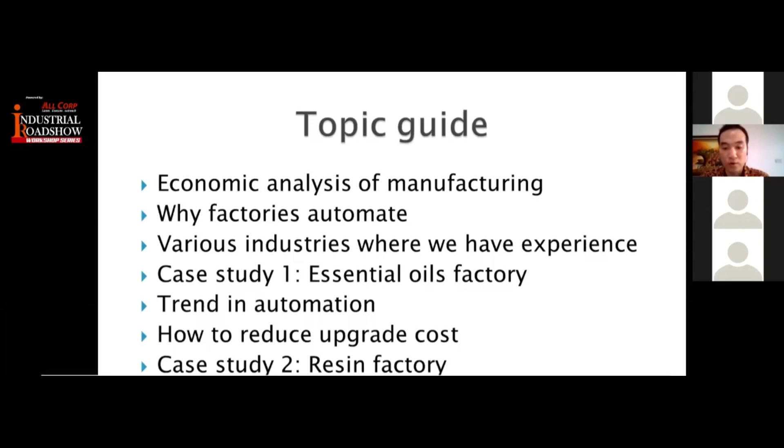As we know, as business owners, the main thing you actually want in the end is the net profit, right? It's a factor of three things: revenue, expenses, and finally the cost of production, which is COGS, cost of goods sold.

The first part, revenue, is to do with how to sell more, so that's to do with branding, product, and things like that. The second part is expenses, things such as electricity, rent, and other costs.

Finally there's the cost of goods sold, which is how much it costs to make your finished product. That's a component of labor cost and cost of waste product, usually products that you already made but failed the QC, quality control, process, so you cannot sell them to the customer.

So it becomes waste. The third component is productivity, in that how much your factory can make in one day or one shift. Now, these three things are usually the main reasons why a lot of factories automate, and this is the core of what we are trying to improve with our service.

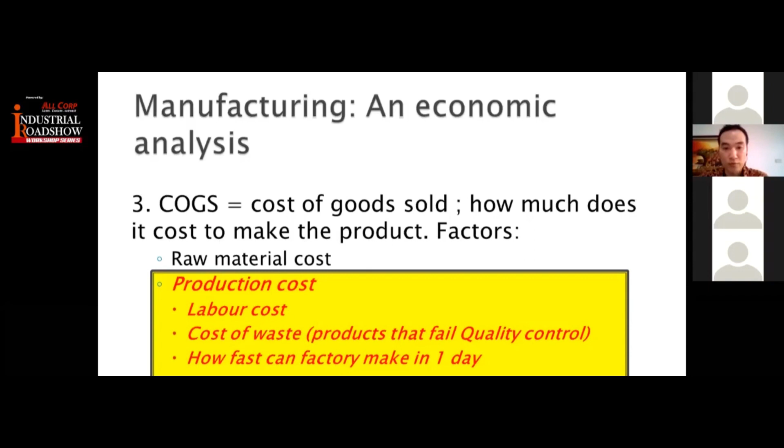So why do so many factories automate? You will see that in developed economies there's usually more automation. In developing countries such as Indonesia and maybe Myanmar, the level of automation is less.

But the reason why eventually most places automate is because, number one, your labor costs usually become more and more expensive over time. In Indonesia, labor costs each year usually go up 5, 10, 15% every year, and you still have to take into account things like health insurance and other costs.

These things will make your production cost increase compared to automation, where it's usually initial capital expenditure, but after that it's very low maintenance and definitely does not go up in price every year. So the main reason why companies automate is to reduce the labor costs required for manufacturing.

Number two, which is less known, is you usually get improved product quality. We will go into the case study and you will see what I mean by this, but improving product quality is very important if you are to get the most out of your revenue - reducing waste material and improving consistency of product so that your customers get the same product every time.

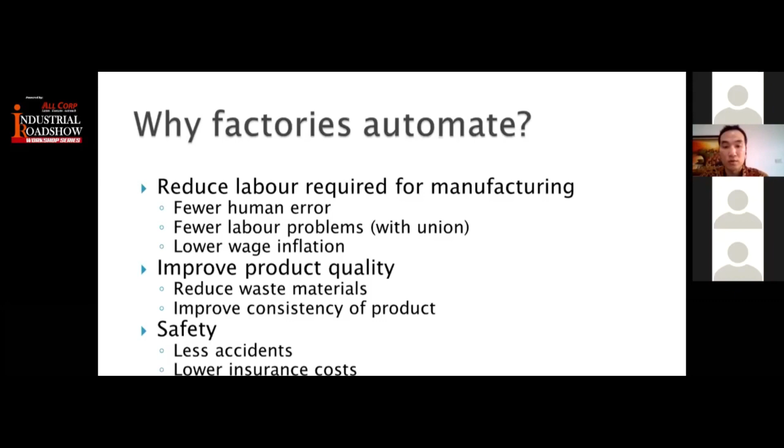So in summary, lower cost of goods sold will mean higher net profit. Now, not all automation is the same.

The process that we do is the table on the left, which we call process automation - things like heating and cooling, batching, other industrial processes, mixing, things like this - compared to task automation. The main difference is usually that with the table on the right, you can already buy a complete machine.

Things like a bottling machine, maybe a noodle maker - you just put in the raw material and it comes out as the finished product, or a printing machine. These kinds of machines, we do not do - they are not our expertise. What we do is mostly a whole factory of automation, and then we provide parts and components of that system.

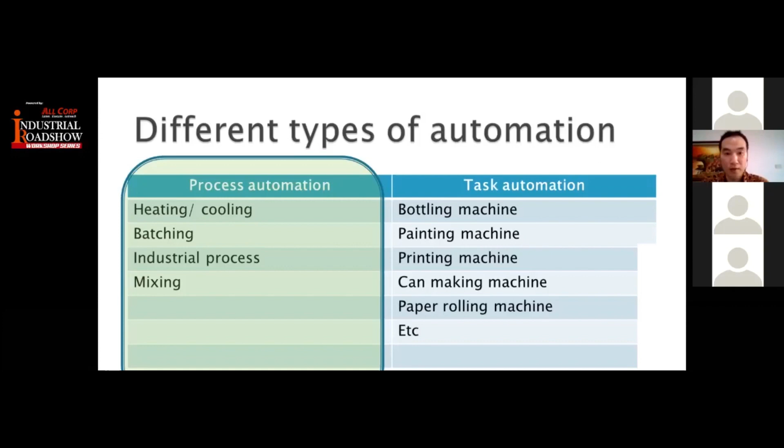Now, can my factory become automatic?

Almost always the answer is yes. Other than factories where you need special human skills, such as maybe a cup factory where you need to make the cup by hand, like a handmade cup factory or things like that. But most factories can, and most factories always go to some percent of being automated.

Some of the main actions that can go automated are things like opening, closing valves, turning on or off pumps, agitator, blower, or your boiler machines, reading all sensors on the field, temperature, pressure, flow, level, right? Things like that, as well as batching. So batching is: I want to create 1,000 liters of product. That is called batching. It's very hard to do with manual labor, and it takes a lot longer per process.

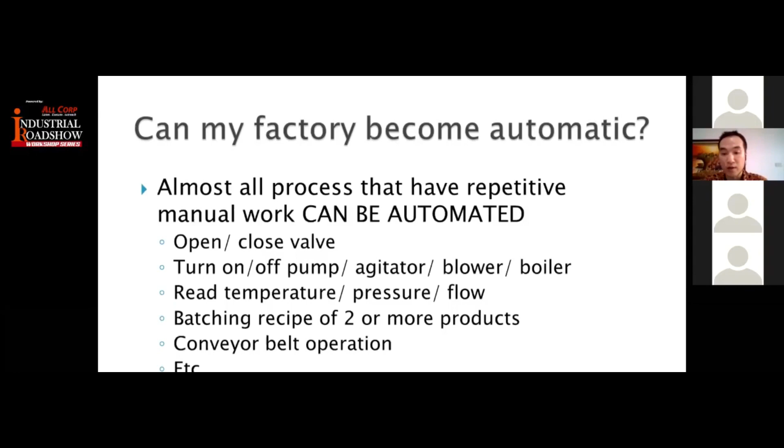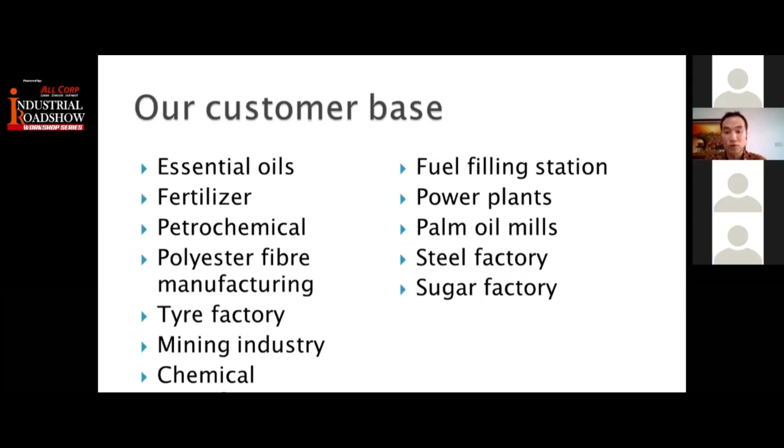Now, some of the factories that we have had experience in, if your factory is in this list, then you know that this is the trend worldwide. So things like essential oil, fertilizer, petrochemical, polyester fiber manufacturing, tires, mining industry, chemical. Chemical is a big one. I don't know what the industry of chemical is in Myanmar. Fuel filling stations, power plants, palm oil mills, steel and sugar factories. So if you have a factory along these industries, then you know for sure a lot of the process can be automated.

Okay, so we go to our first case study. So we recently did this probably about 1 year ago. It's an essential oil factory. So essential oil is like getting usually the smell of a product. For example, clove or cinnamon or coffee or vanilla, things like that. So they get the raw material, which is, for example, coffee beans, and then they want to get the chemical that has that smell, right?

The key process that they automate is a process called fractional distillation, right? It's basically heating up the oil until it becomes gas. And then the gas is condensed and then it becomes a pure essential oil from that material, right? So we'll go through the process a little bit. So the material is inserted into the tank and then mixed with water. In this way, the essential oil will go into the water, and then it is pressurized to a high pressure so that all of the oil from the material goes into the water.

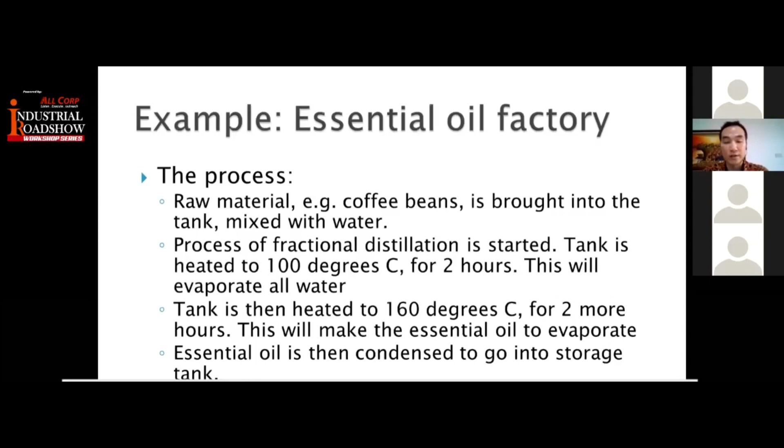So this process is not very complex, but it is high risk because you have high temperature, high pressure, and a lot of components need to be monitored for safety. So in the past, they had field operators to manually open and close the steam for the temperature, things like opening, closing valves for the condenser tanks, and then also monitoring the pressure and venting valves. So there's a lot of manpower involved.

So when we look at the study of the before and after, the initial headcount for their operation totaled 14 people, right? So you have 7 operators for the production, the fractional distillation component, and then you have an extra 7 people for the utilities. So the wastewater treatment plant, the boiler, as well as production manager and QC. So this is just on the plant floor.

So there's 14 people. Now, after the automation, what you get is a total of 6 people, because all those people who are opening and closing valves, monitoring pressure, monitoring temperature, all of those people can now just sit in the control room looking at the computer screen, and everything is controlled from the computer screen. So there's just 2 people on maintenance. So usually there's people on the plant floor, 1 person in the control room, and then the rest is the same.

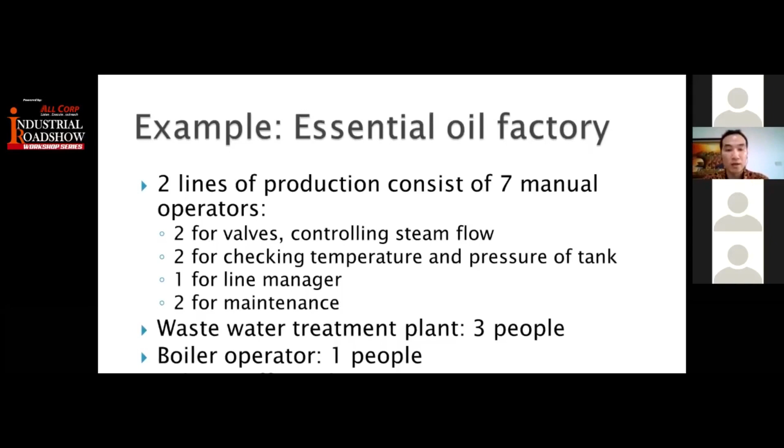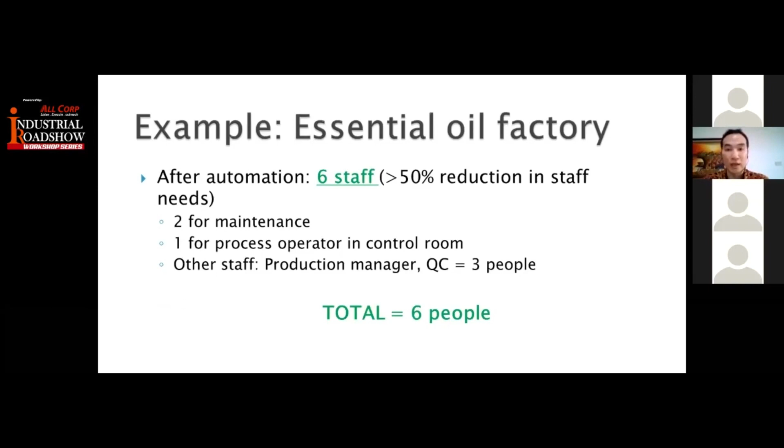So the production manager and QC is still the same. If you look at the previous slide, on the last line, production manager and QC is still 3 people. So that's not changed. But all the people doing the process on the floor is essentially reduced to 2 for maintenance and 1 for control room. So that's more than 50% reduction in labor staff requirement, right?

Now, some of the benefits of what this upgrade has brought to this factory. The first part is that you get production increase. How did this happen? Firstly, because the temperature is monitored instantly and all controlled from the one site, you can achieve the temperature a lot quicker. Maybe before it took them 1 hour to reach 100 degrees. Now they can get that in 30 minutes, right? And you also can monitor the process a lot better. The end result is you get a lot more product from the same equipment.

Secondly, waste material is reduced by 20%. What happens in this waste material? In the past, because the process took a lot longer, you need more diesel, you need more water, things like this. And all of that is reduced because of automation.

Number three is better consistency in finished product. Previously, you get bad product if the temperature is too high. In that case, the essential oil will be a little bit damaged. And this means that they have to throw away some products because it's too hot, and then the essential oil becomes bad.

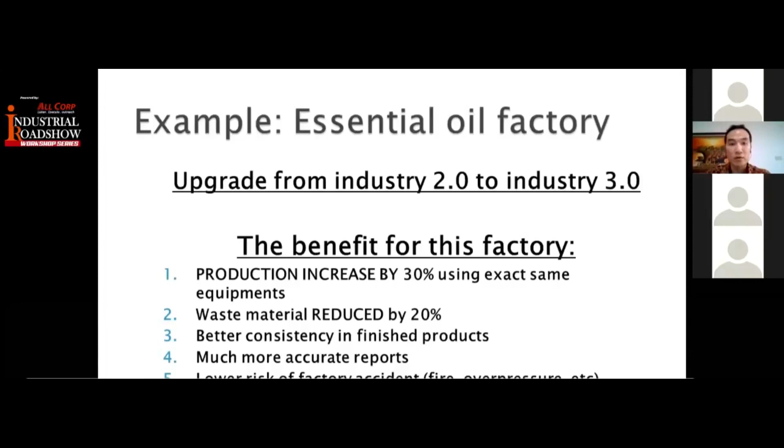Let's go into the operator screen. So this is a quick look of what the finished plant looked like. Now I don't know if I can use the mouse here, but you see on the left, on column A, there's about 12 temperature sensors, there's pressure sensors, and there's a lot of things like level switches. So all of this had to be controlled.

For example, if you look at the left side, there's a logo called Thermic. Thermic is basically the valve that controls the steam. The steam is the thing that heats up all the tanks. So that's the temperature control, where it's a lot more efficient and accurate compared to manual work. Now, this is just one screenshot of the plant, where you can see everything on the one screen, everything is recorded, and everything can be automatically shut down centrally. This helps a lot with safety, accuracy, and efficiency.

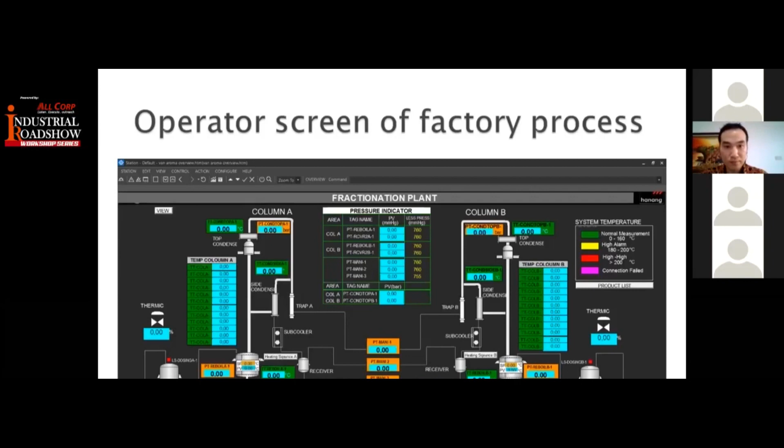Right. So this is a financial analysis of this upgrade. Obviously, all the tanks, the boiler and the valves are already there. We just have to automate them. So the cost is not as high; you would have to buy them all if you didn't have them from the beginning. So we just had to do a minor upgrade on the plant floor, but we add a lot of the brain, which is called the control system, right?

So the cost of the project, including installation, is 30,000 US dollars, right? Now, when they look at it, the cost savings of the wage cost per year last year adds up to about $25,000 per year for 8 people, right? So this was the one factor that they look at. Obviously, there's other factors like less waste product and things like that, but we are not given information on that.

So even looking at just the one factor, which is manual labor and the cost savings, you get a very high return on investment with a payback period of less than 2 years. So you get a very quick return on investment on automation. Now, not every project is going to be this high of investment return rate, but I'm just saying that it can be this high and it can be even higher.

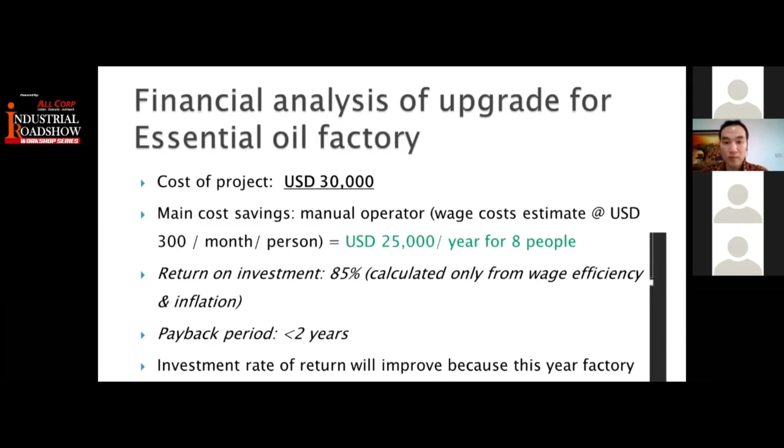So basically, with control system projects and automation, it's very flexible, meaning that you can start small and then add on to the project. That way you get better return on investment every time you upgrade. Now, a quick one on the trend in automation. Now, we all hear a lot about Industry 4.0, but what most people misunderstand is what 4.0 means. Now, let me go through all the automation versions.

These are quite industry-specific terms, right? And there's a lot less labor required, right? As you can see before, you have more than 50% reduction in labor headcount once you apply automation. In some cases, it can be up to 70% reduction in labor requirement. Now, the next part, which is what we have now, is Industry 4.0. What does it mean? It's Industry 3.0 combined with IT infrastructure.

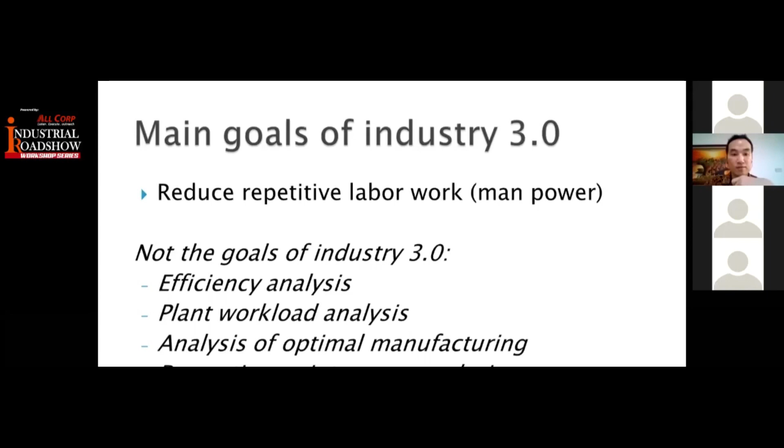So if I go to the next slide, you can see in 4.0, you have all these things like efficiency analysis, plant workload analysis, optimal manufacturing. For example, should I make material A first or B first or C first? And then the next one is preventive maintenance. So is my pump or motor almost at breaking point? Should I service it before it breaks down and makes my factory shut down?

And then all these other analyses, like waste material analysis, were not possible automatically before. In the past, you would have to make a production report, a main material usage report, and then combine it into other systems like ERP and MES systems. But now in Industry 4.0, you can combine all of this data into the ERP systems in real time, and you get a much better analysis.

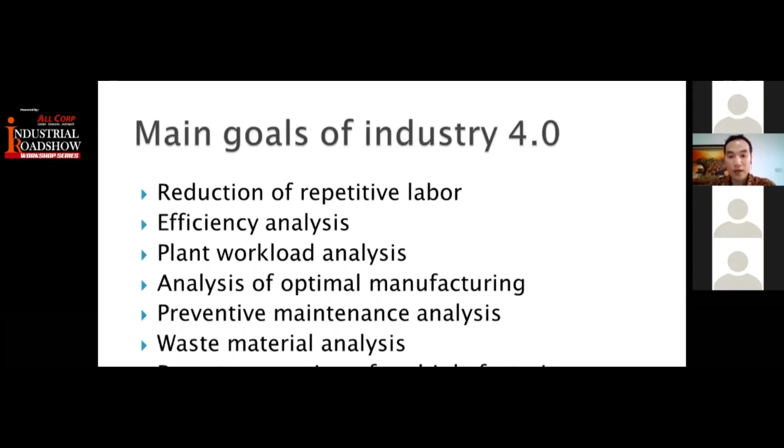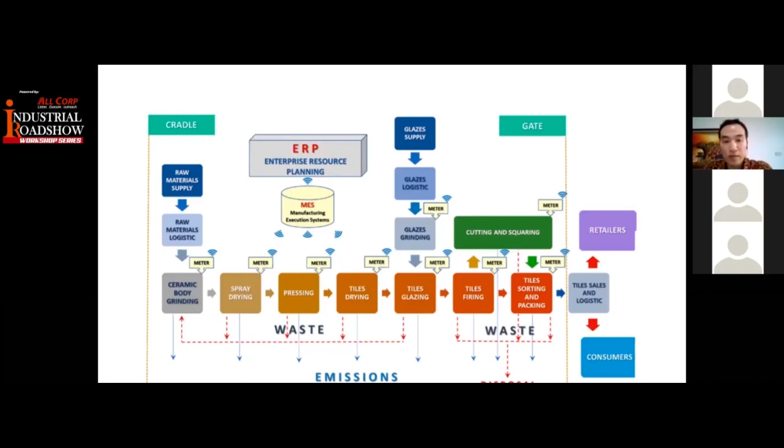Now, if we go to the next slide, I look at the reasons why a factory should or should not go to 4.0. The first point is that companies without ERP systems and MES systems - MES is a manufacturing execution system - if you do not have those systems in place, there isn't really much benefit from going to 4.0. It'd be good enough to just stay in 3.0.

Now, the majority of automation costs occur in upgrading from 2.0 to 3.0. The final thing I want to note is that going from 3.0 to 4.0 is very complex, because most integrators like my company only focus on the plant floor. But in 4.0, you need integrators who are very experienced with IT systems, like ERP systems like SAP, for example. Most integrators who do automation do not have this expertise.

So if you're going from 3.0 to 4.0, you must know that it requires a whole new level of integrator experience. A lot of projects have failed in Indonesia because the integrators are not yet experienced in these two different worlds. Most of the time, as an automation provider, we do not need to know IT systems. But in 4.0, you really need to know IT systems, especially when working with third-party software like SAP or Oracle. This is not something that we or other integrators in the industry have had. So you must be careful when going to 4.0, because it's a whole new level of complexity.

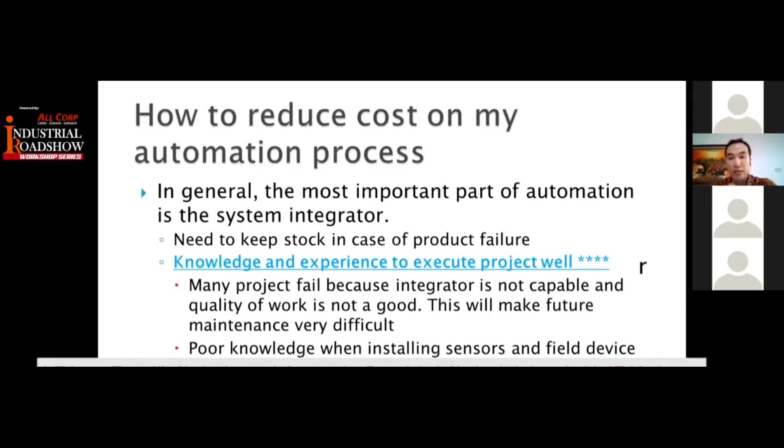That's the main thing, because as you know, when building a house, you can have really good materials, but if the person installing it is not competent, you can end up with a very bad house even though the material is good, because the installation is the key part. So you want to find an integrator that has a lot of experience and a good support team, because no project is ever good from day one - it always needs improvement. So the integrator needs a good, experienced team.

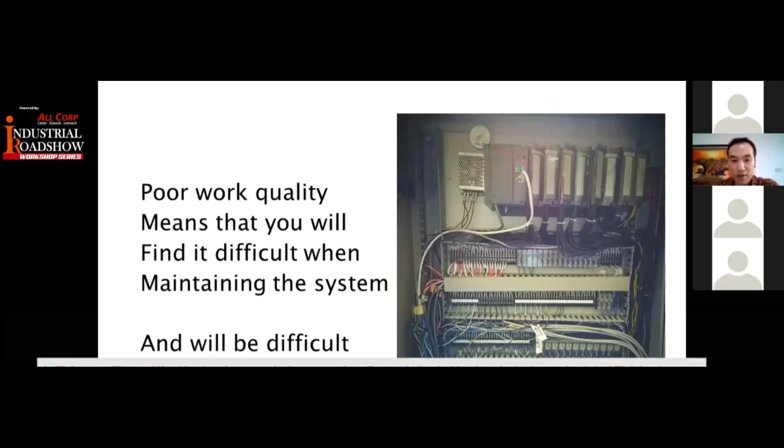Now the second point - here's a photo of badly done work. As you can see, the cabling is not well done. A bad integrator can mean you'll have a very hard time upgrading your system, or if something is wrong, it'll be very hard to find out where. As you can see here, it's a spaghetti situation - you don't know which wire is wrong or where. So this is a bad job. Now, the second most important part of automation is the control system.

The control system is the brain of the automation factory. The brain is the one that is on all the time and works all the time. So in most cases, it's usually a PLC, or in a bigger factory, it's a DCS.

You want to go with brands that are reputable with a long track record. We bring the brand of Honeywell, which is from USA, but usually the most common brands in this field are Japanese or European, mainly Germany, as well as USA. So you want something that has high reliability and is a proven product.

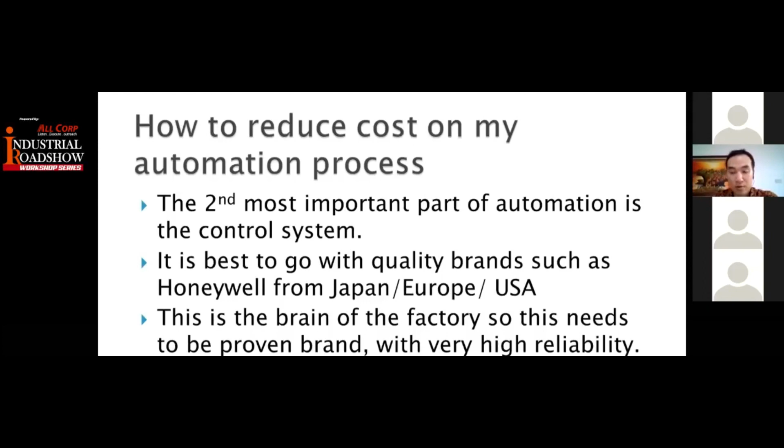Because if this component fails, your factory will not operate. If it takes 1 day to fix, you will lose 1 day of production, and that is a lot of money. So the price difference between a cheap brand and a good brand is very small. It makes no sense to save money on something like that.

Now the final part of the automation is the field device. So these are things like your pumps, valves, pressure sensor, temperature sensor. This is the part where there are so many choices.

Usually the best quality products are from USA, Germany, Japan. The middle quality is usually Korea, Taiwan brands. And then the lower price, where you have probably the very, very cheap price, but also maybe the quality is not so good, is from China and India.

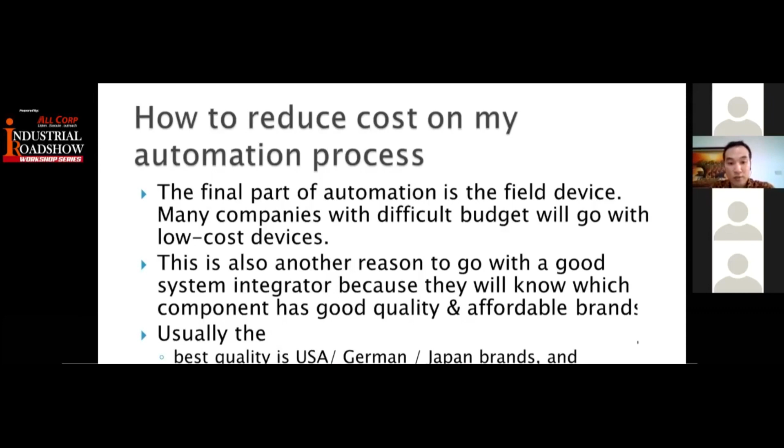So these two countries usually, for factories who are just trying out automation and don't have a lot of budget, they usually start off with Chinese brand or Indian brand, and then as they see the benefit of automation and have more cash flow, they will upgrade to the other brands above it.

Now, usually in most cases, this is the part where companies will try to reduce their budget, because even Chinese or Indian brands will still work. You may not get a long lifetime, but they will still work, and the accuracy depends on what you buy.

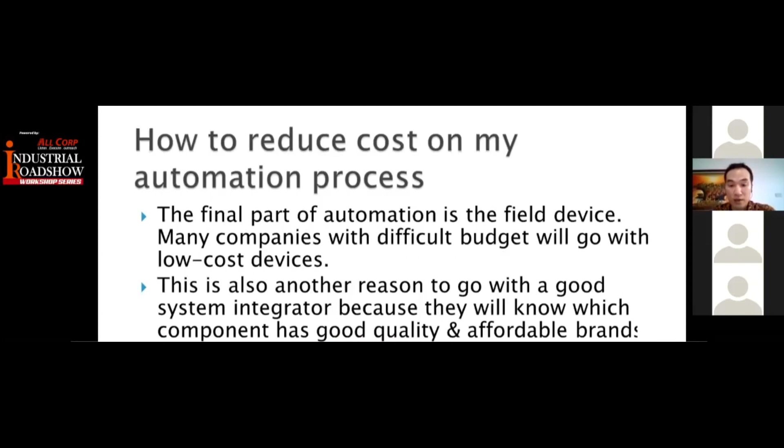Here's the other part that we see a lot of companies use to reduce the capex, the capital expenditure cost of an upgrade. One of the bigger cost benefits is to skip using a consultant or an EPC company.

We have worked with many companies who try to automate, and instead of hiring a consultant company or an EPC company, they hire an expert as the project leader. This project leader is essentially the person with the design and the knowledge.

Usually this project leader has worked in a factory that is already automated, so you can understand what the other companies have done, and then they will help you make your factories a lot better. This method is a lot cheaper than going with a consultant or an EPC company. So an EPC company is like the main contractor of a factory automation project.

As a benefit, you get not only cost savings, but your team will also know your factory automation a lot better because they execute the project themselves. And then you can bring companies like my company to do the actual field products.

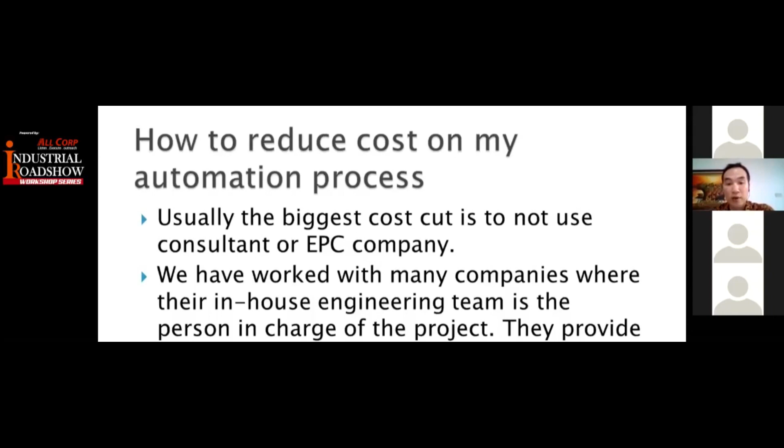Mistakes on these projects: number one is always the system integrator. A lot of system integrators, when you ask them at the beginning, do you know how to do this? They always say yes. But you really want somebody, if you get a reference or case study of what they've done, so you know that they actually know what they are doing.

And the second part is usually the equipment that is chosen by the integrator who is not experienced. So things like materials that are not compatible, so you get corrosion or very short lifetime. Things like materials that are not rated for temperature and pressure of your factory, so it breaks down a lot quicker.

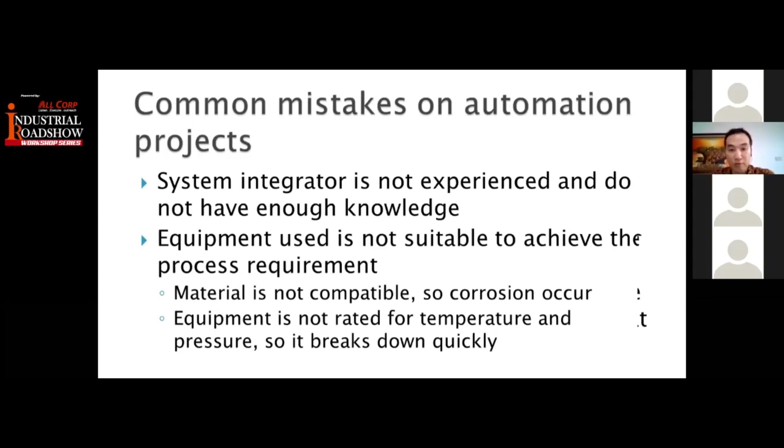Right, so we'll quickly finish up. This is the final case study. It's a resin plant. This is the same story — it used to be mostly a manual plant, so they would mix. Resin is like adhesive that you use for furniture to make the wood stick. If you look at low cost tables, it's actually wood chips, not solid wood, but wood chips, and then it's combined with resin to become a solid wooden material.

So it's a combination of 6 or 7 chemicals, such as formalin, water, nitric acid, and so on. You need to mix it according to customer request. The customer with the highest quality will ask for the most active agent like formalin, so it becomes more sticky. Whereas the cheaper customer cannot afford the expensive product, so they need to just add more water so it's cheaper.

So in this project, the main complexity is in batching and ratio control, because all of those things need to be mixed to the correct concentration.

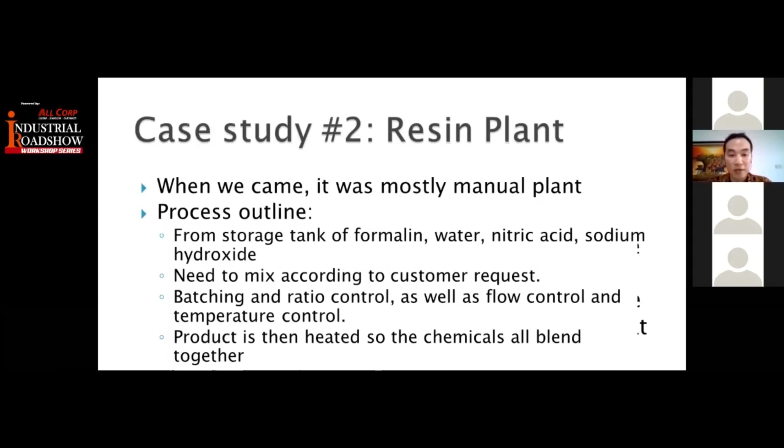Now, another component is that about 5 years ago, they had one big accident where the chemical pump was not turned off, but on the other side, the valve to the tank was already closed off. So you have this situation where the pump is still pumping, but the outlet is already closed. So you get a big pressure buildup, and then eventually the pipe burst. This caused all the chemicals to spill on the floor and cause a big problem, a factory shutdown, and many government fines.

And then you can even add recipes. So for example, customer A is buying the same concentration mix every time. You can put that into a recipe, and then with just one click, and you put in how many liters of chemical you want, the whole system can take care of that for you. The accuracy is a lot better than manual work.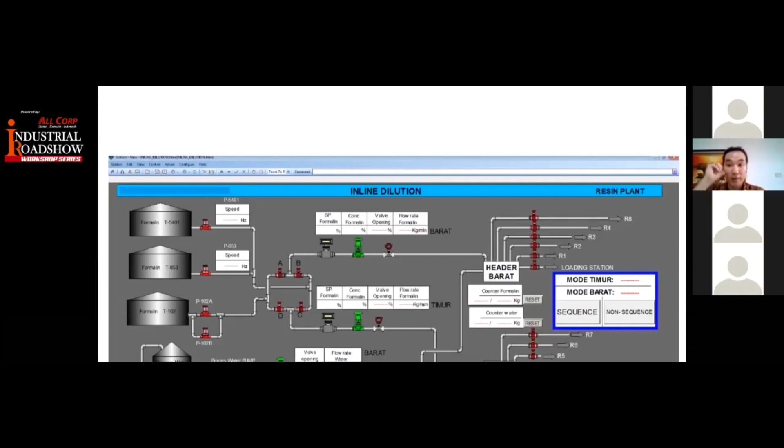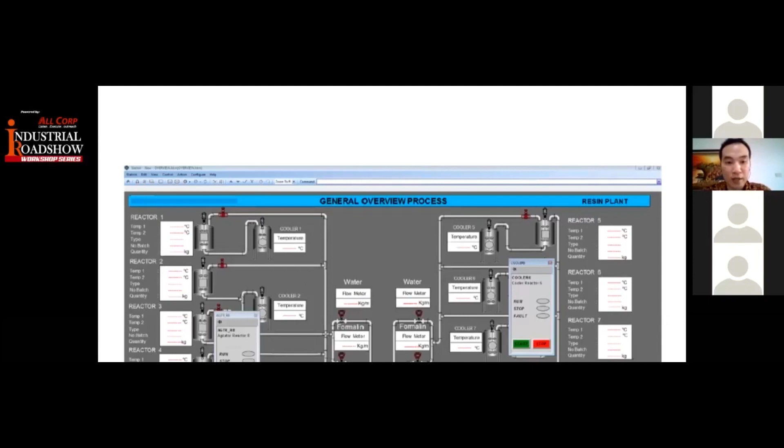Here's another part, which is the reactor. So once they are all mixed together, they need to be heated so that the combination works well and all the chemicals are mixed together. And then here's the final part, which is what is inside the heating reactor.

So you get things like analysis, like the weight, temperature control. You have the pH analysis and things like that. So all of this you monitor, and if you were to do it manually, this would be very complex, and you need a lot of people.

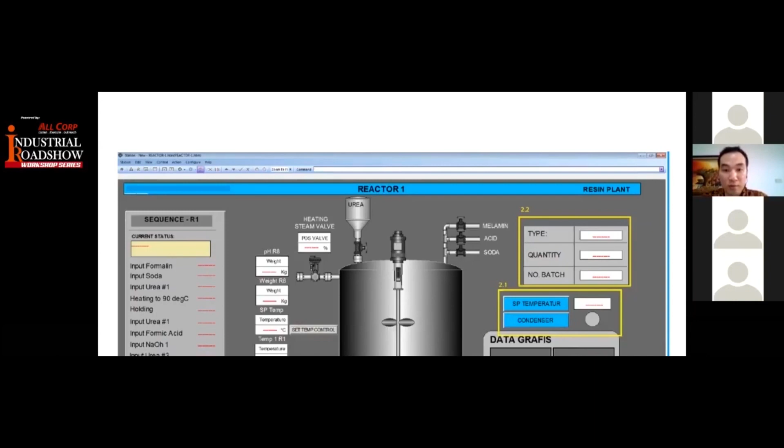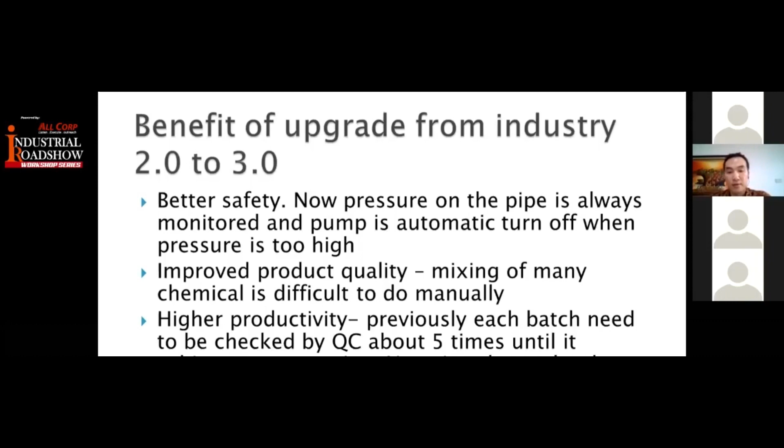Okay, now that's the conclusion of my presentation. What to do next if you're a factory owner or a plant manager? The first thing is usually to analyze your process. Is it efficient? Do you think it can be better? Maybe look at your competitors or look at what they do in other countries. And usually you'll find that automation is a key component.

Now, maybe I don't know what the next steps are. If there are local suppliers, or maybe you can contact us for consultation. But the final thing I want to say is that you don't need to automate all of your factory in one go. You can start by automating maybe 10%, 20%, and then build up to more automation. You can do it gradually, no need to do it all in one go. Yeah, that's it.